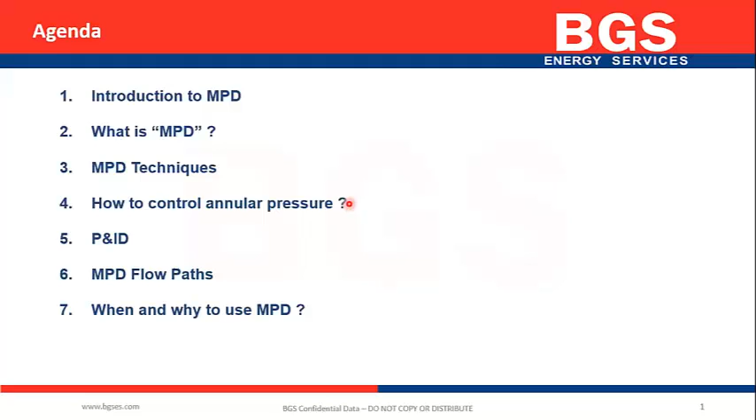So let's refresh our mind by speaking about conventional operations. During drilling, when the pumps are on, the bottom hole pressure is equal to the hydrostatic pressure plus the annular friction pressure. So we have the bottom hole pressure almost constant. But during connection, when the pumps are off, we lose the annular friction pressure because there's no circulation. So a drop in the bottom hole pressure happens, and if this drop is below the pore pressure, an influx may occur.

But in MPD operations, during drilling, yes, the bottom hole pressure equals the hydrostatic pressure plus the annular friction pressure, but we have an additional new term, which is the surface back pressure. So what happens when we turn off the pumps and go to do a connection? The equation becomes bottom hole pressure equals hydrostatic pressure plus surface back pressure. In that case, we increase the surface back pressure so that we can have an almost near-constant bottom hole pressure, the same during drilling and connection, or almost the same.

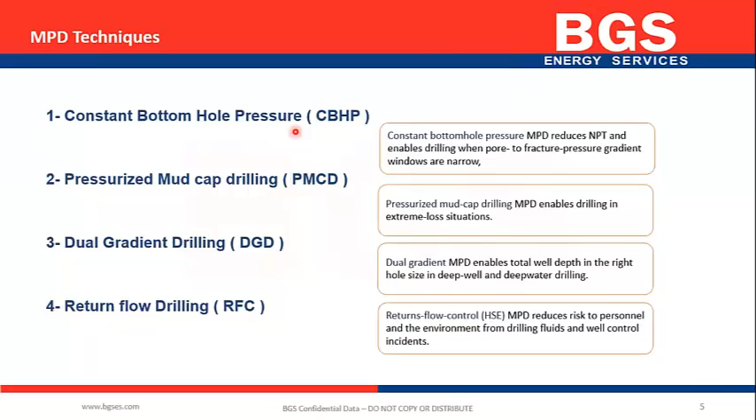So we said that the definition of MPD is to control the annular pressure. So how are we going to control the annular pressure? We need to use both engineering and equipment.

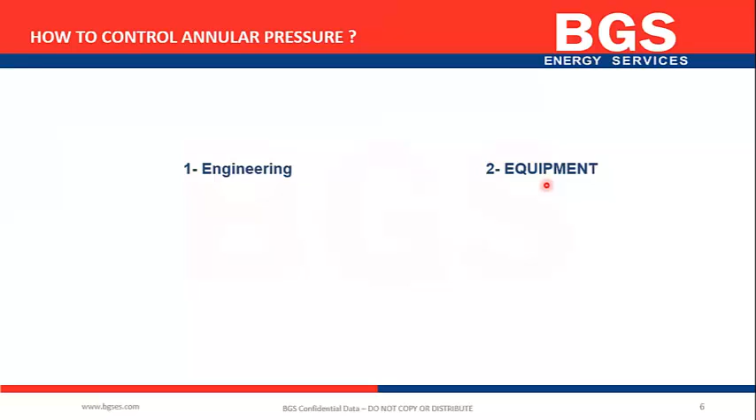So for the engineering, we should design our hydraulics. So what we need to know or to have: we need to calculate the MASP, which is the maximum allowable annular surface pressure. We need to know the annular friction pressure, and finally we need to calculate the bottom hole pressure.

So we have the pore pressure and the fracture gradient. We can use the fracture gradient to get the fracture pressure. The fracture pressure is equal to the hydrostatic pressure plus the MASP, which is the maximum allowable annular surface pressure that we shouldn't exceed, because if we exceed this value, we are going to frac the formation.

So we have the fracture gradient, we get the fracture pressure, we calculate the hydrostatic pressure, so the MASP will be the fracture pressure minus the hydrostatic pressure. So number one, we already know the MASP.

Second, we need to calculate the annular friction pressure. There's an equation we typically follow for calculating this pressure, which is equal to 1.4327 multiplied by 10 to the power negative 7. We multiply this by the mud weight in ppg and multiply by the true vertical depth in feet, then annular velocity divided by the hole diameter minus the drill pipe diameter.

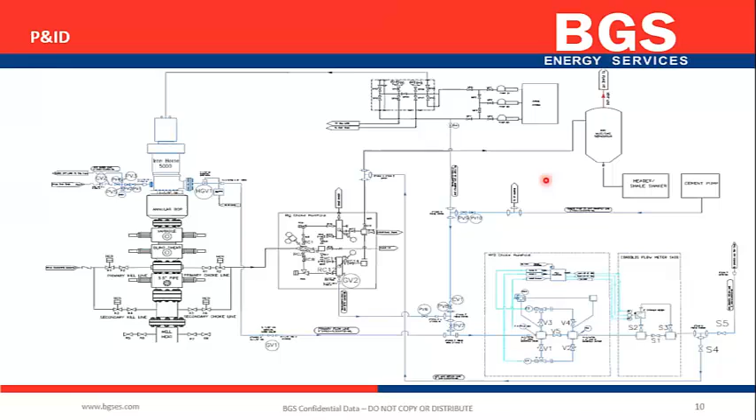Okay, we are going to speak about this point at the end of the presentation. There's a slide specifically about when and why to use the MPD. Okay, and another one wants you to repeat the circulation cycle again. Okay, on the P&ID, the one who asked about the circulation cycle, you need to know about the P&ID, right? I think that, yes. Okay, I will discuss it.

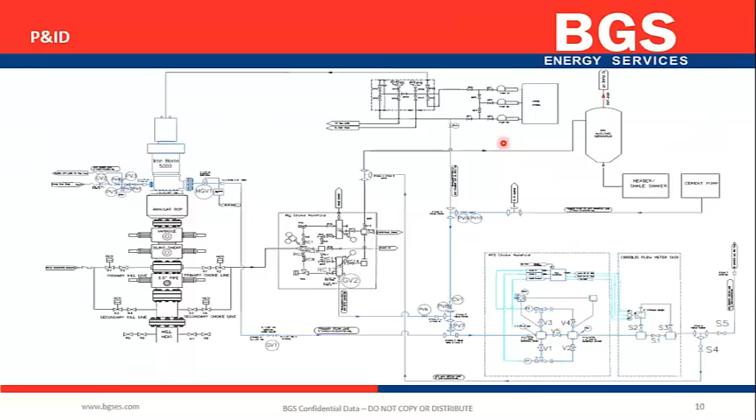Okay, so for those who were asking about the circulation, we will discuss now every condition we have: the drilling condition, during connection, how the flow path works if we are going to circulate an influx, and also during conventional drilling.

First, let's speak about the drilling flow path using managed pressure drilling. Usually we have the rig pumps which start circulating, it goes out from the standpipe, it goes down. This is normal, but the return we take from the RCD, and instead of sending it to the rig choke like in conventional operation, we send it following the arrow.

We move directly to the MPD choke manifold. If it's okay, nothing happened, we continue to the Coriolis flow meter. We measure the flow, and if it's okay, we send it to the shale shaker if there's no gas, and directly to the shale shaker and the MGS if we need, completing the circulation process. This is during using the MPD, which means the flow passes through the MPD choke manifold.

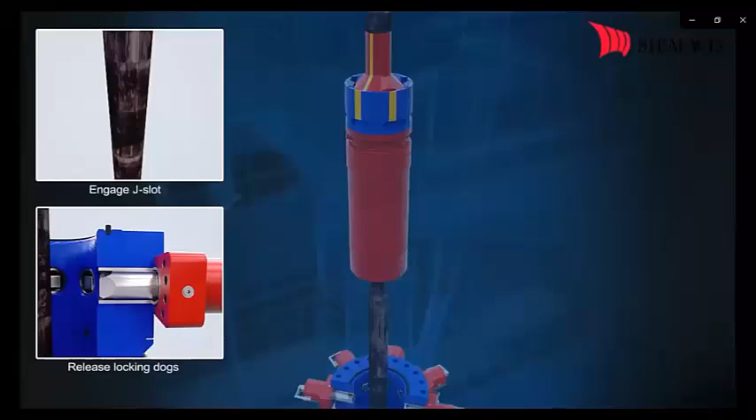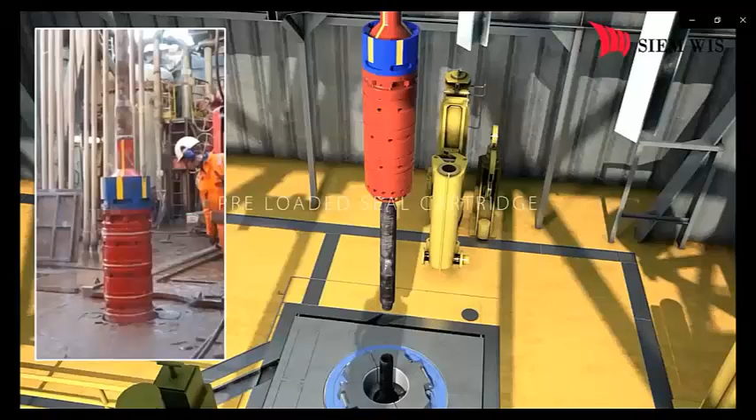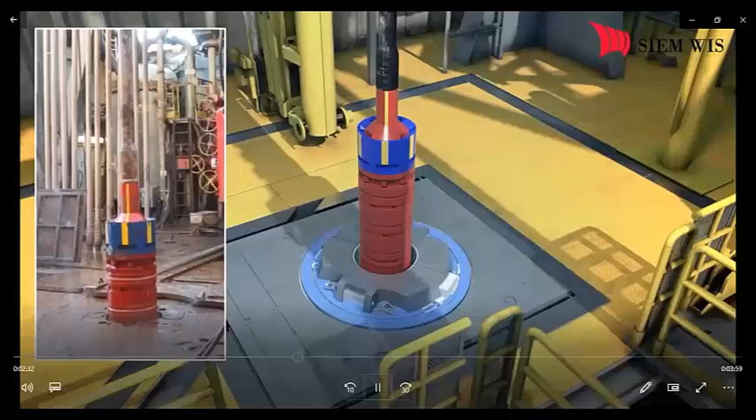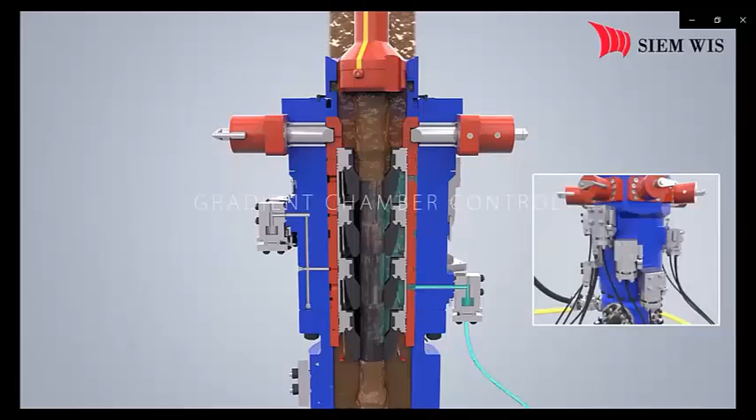The preloaded seal cartridge is retrieved from the deck, made up, and run in hole using the speed-fixed J-slot running tool. The locking dogs lock the seal cartridge in place when the seal cartridge is landed. Fluids for gradient chamber control and seal lubrication are injected into the seal cartridge, and the packing system integrity is checked and controlled on the control system display.

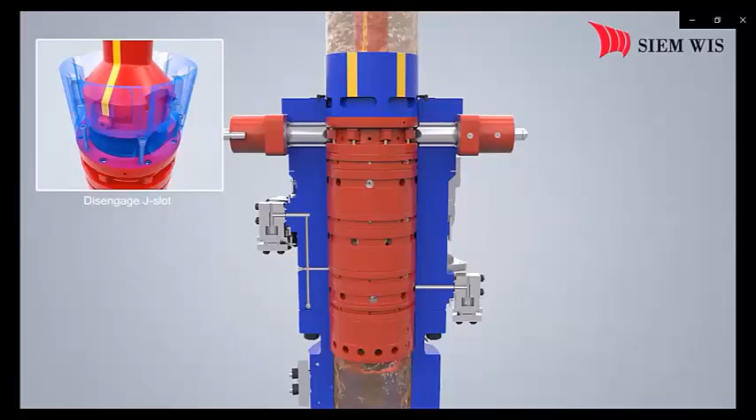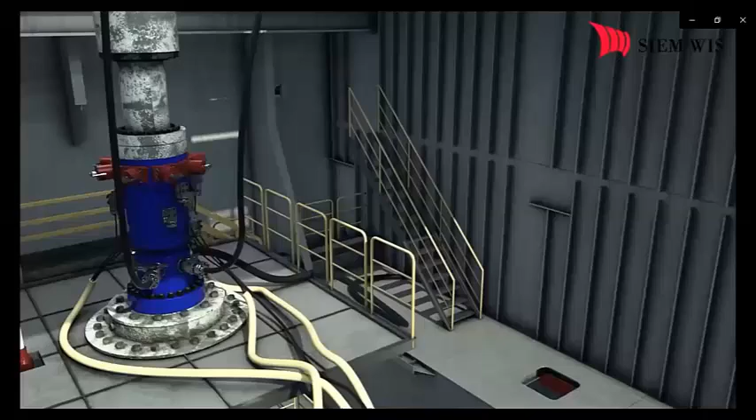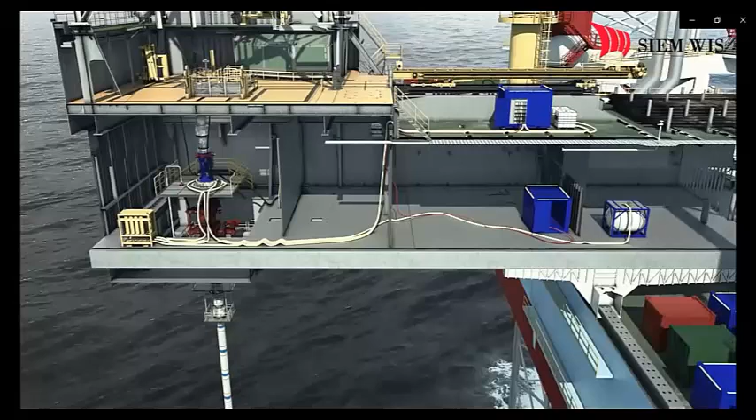The Siem WIS PCD pressure control device system consists of the pressure control device with seal cartridge and bore protector, a pressure distribution skid, a control container, lubrication tanks, a visual display, and drain tanks.

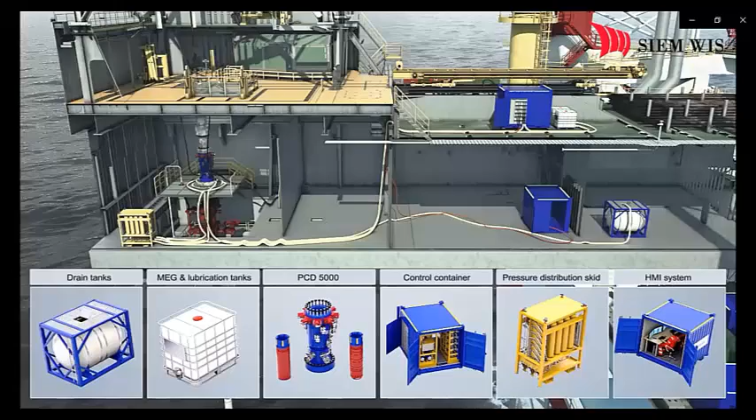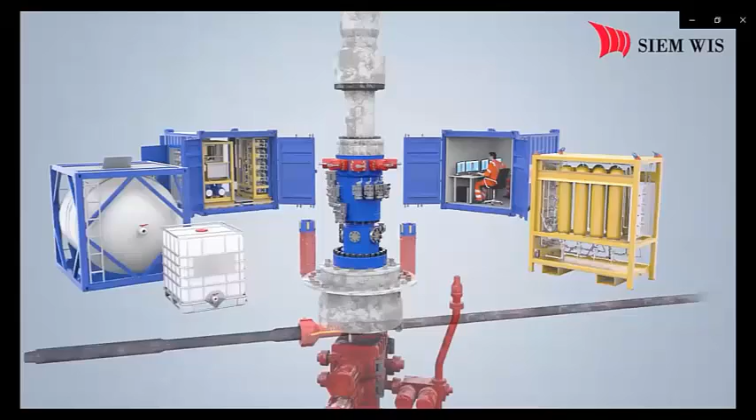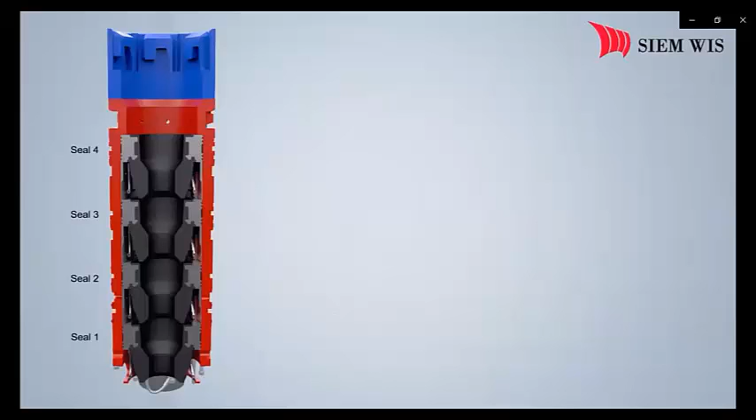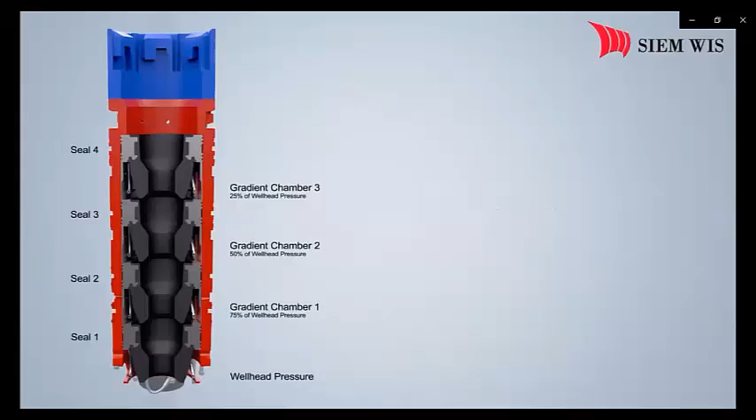The patented sealing solution represents a new and reliable technology for the MPD industry. Instead of one or two rotating elements, as in most RCDs, the Siem WIS system uses four non-rotating seals, stacked in a seal cartridge. The well pressure is evenly distributed over the seals by means of gradient chambers. There are pressure sensors below each seal for control and monitoring purposes.

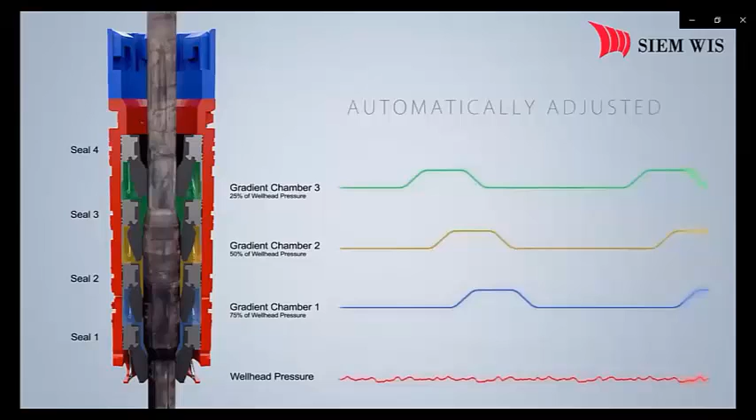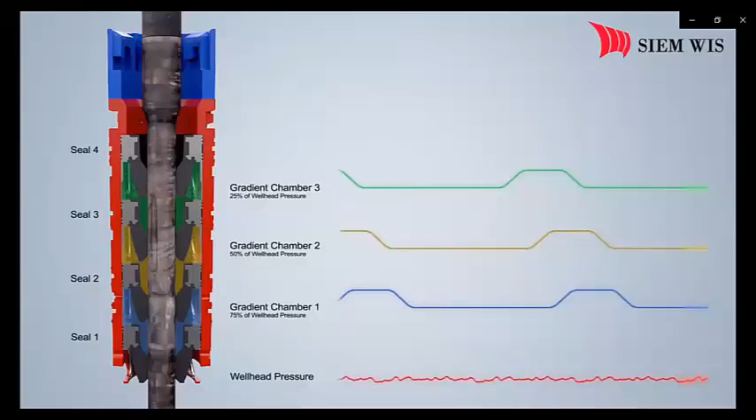The condition of each seal is continuously monitored and logged. The gradient chamber pressures are displayed on the control system and automatically adjusted depending on well pressure. During drilling, the operator monitors real-time seal status, allowing immediate seal leakage detection. The operator will continuously monitor leakage on the HMI system and can plan for seal cartridge replacement when convenient. Due to the multi-seal configuration, drilling can continue even in the event of a seal failure.

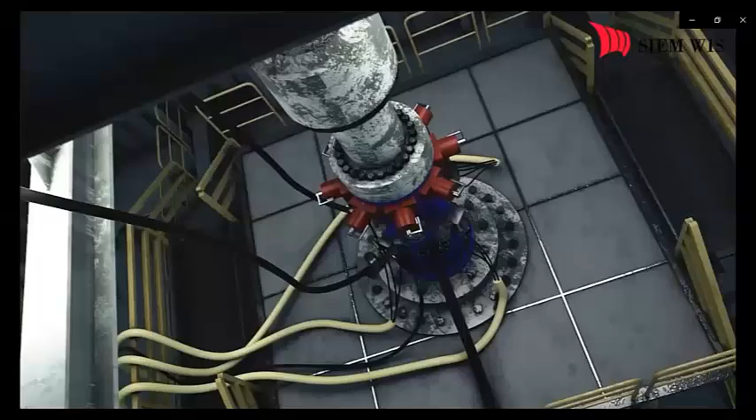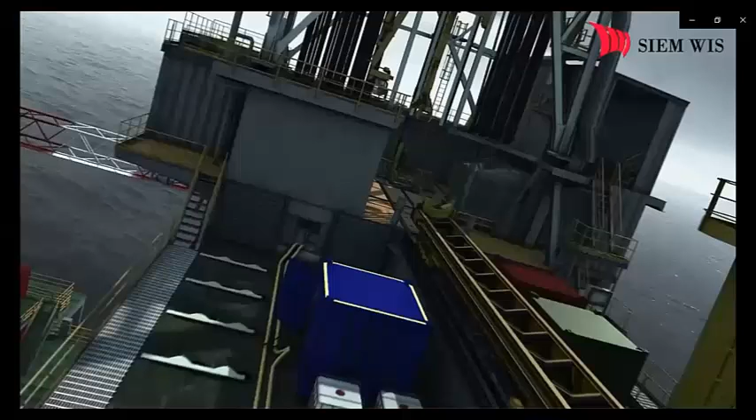This excellent redundancy in the PCD provides valuable and secure predictable information. The Siem WIS PCD system represents a game-changing technology for the managed pressure drilling industry, providing predictability through real-time condition monitoring of the seal status, early wear detection, and redundancy through the multiple seal barrier. In addition, running the seal cartridge is fast, safe, and efficient. Welcome to the future of pressure control heads.

So, gents, before we go on, I need to know if anyone has any question on this video.

Okay, I can repeat it again because this video is important so that it can make the definition of the RCD clear.

Engineer Ahmed, I think the problem was the sound of the video. The sound of the video wasn't good. Can you share a link for the video? Okay, but let me try to play it again. Okay, and if this time it works, okay, if not, I'm going to send it to you. Okay, Engineer Ahmed.

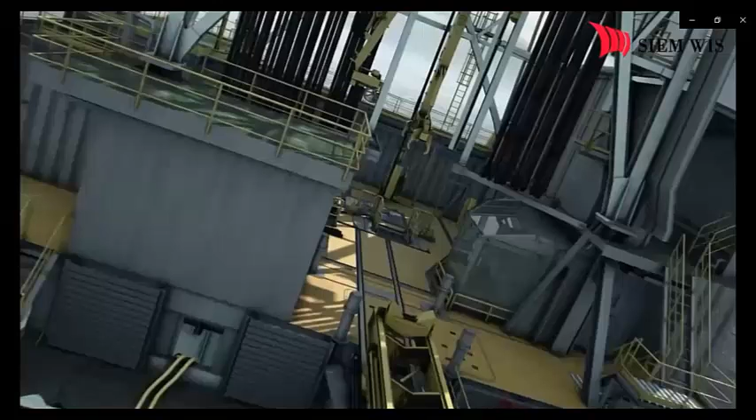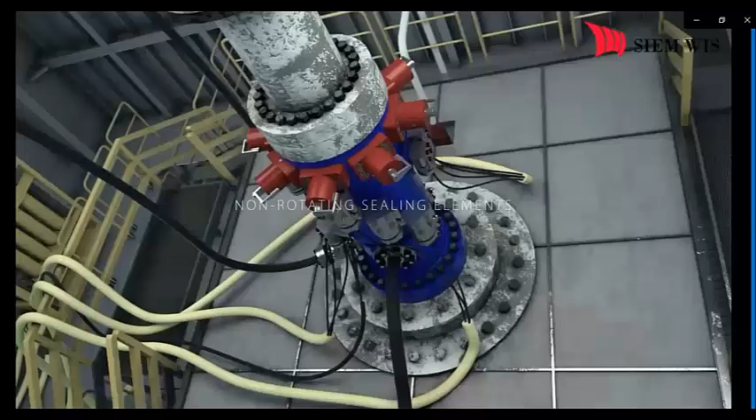The Siem WIS pressure control device, the PCD 5000, is a device that caps and seals return mud flow in managed pressure and underbalanced drilling operations for fixed installations. The control device uses Siem WIS's unique and patented sealing solution, which provides a safe, predictable, and efficient sealing technology using non-rotating sealing elements. The PCD is a multi-seal barrier with seal status monitoring in managed pressure drilling operations.

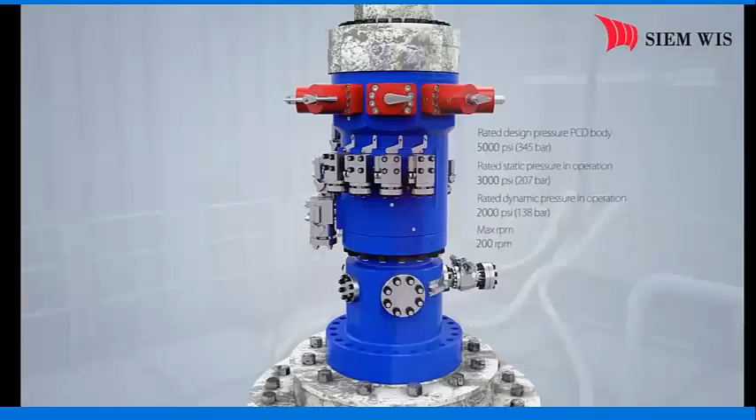A bore protector is installed when seals are not required. The protector has a through bore of 13 5/8 inch.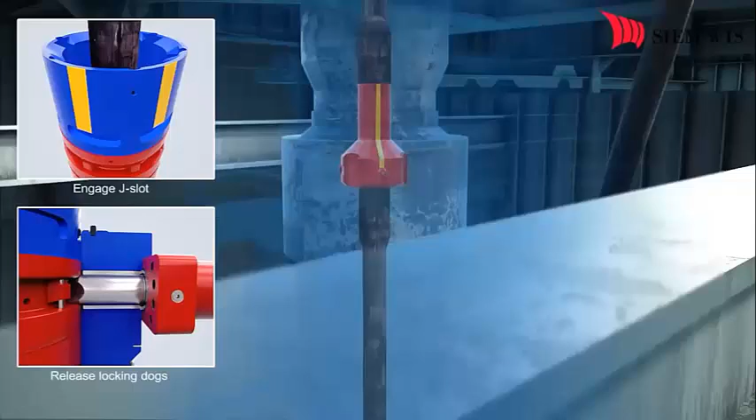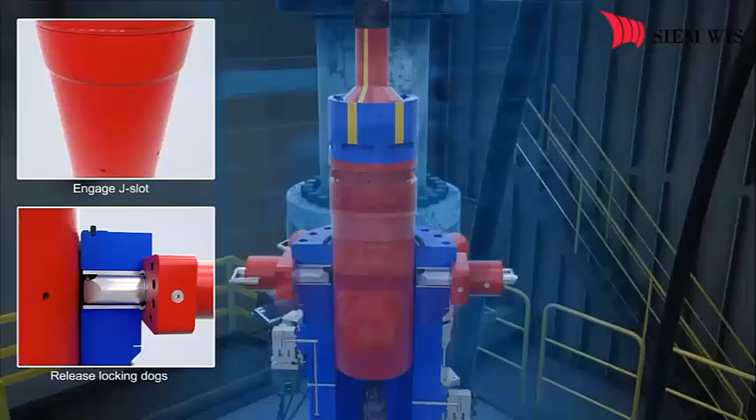The bore protector is run and retrieved with a fixed J-slot running tool installed in the drill pipe. When the running tool has engaged the J-slot, the locking dogs are released and the bore protector can be retrieved. The bore protector is retrieved and can be racked back in the derrick.

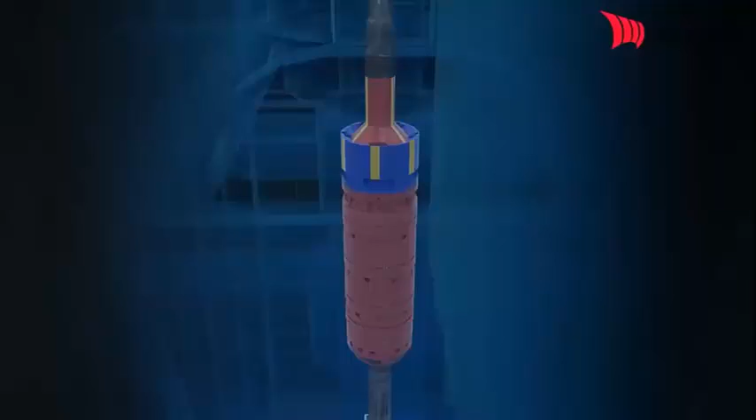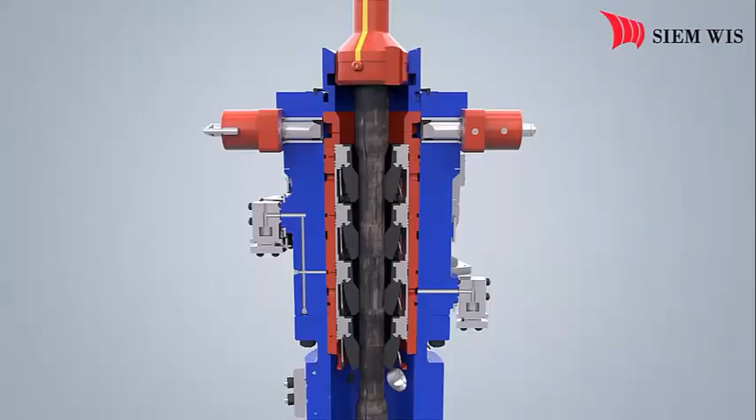The preloaded seal cartridge is retrieved from the derrick, made up and run in hole using the same fixed J-slot running tool. The locking dogs lock the seal cartridge in place when the seal cartridge has landed. Fluids for gradient chamber control and seal lubrication are injected into the seal cartridge, and the PCD system integrity is checked and controlled on the control system display.

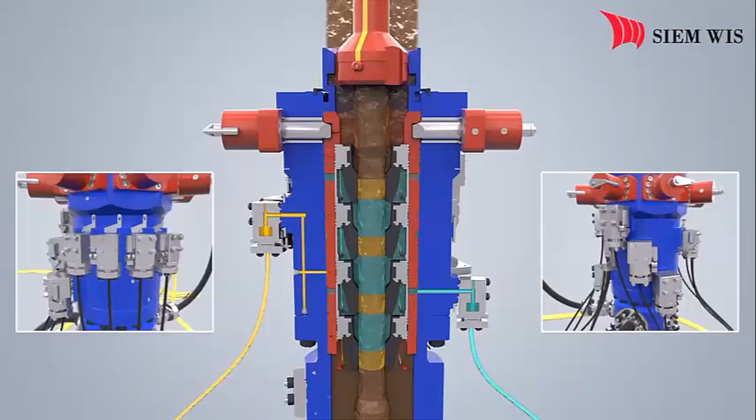The pressure below the PCD is equalized prior to opening the annular. The running tool and drill collars can now be racked back in the derrick.

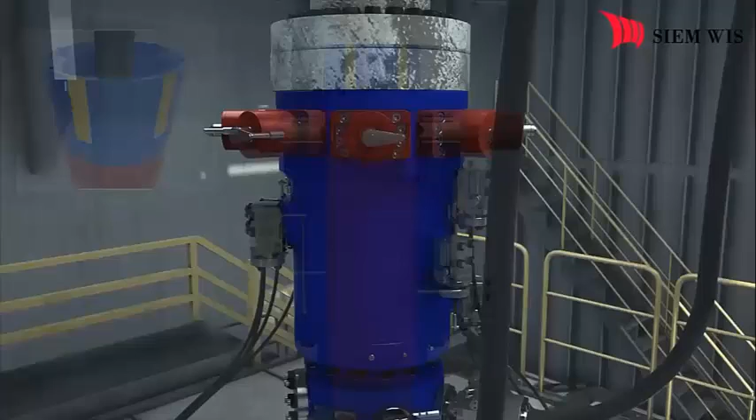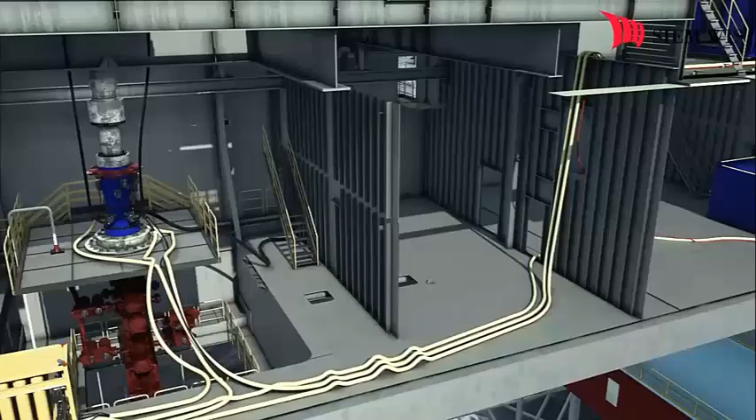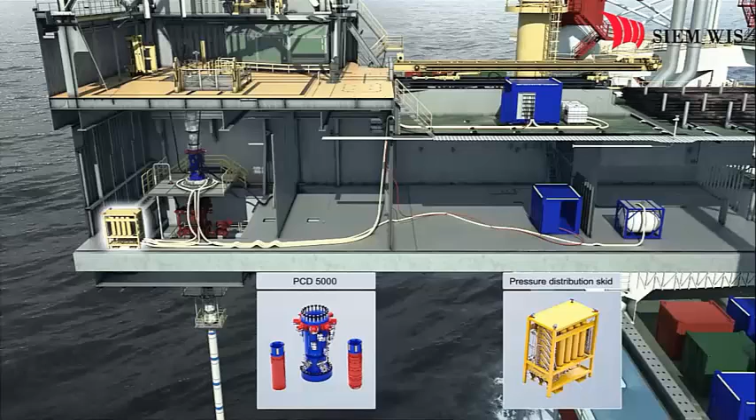The Siem WIS pressure control device system consists of the pressure control device with seal cartridge and bore protector, a pressure distribution skid, a control container, lubrication tanks, a control system display, and drain tanks.

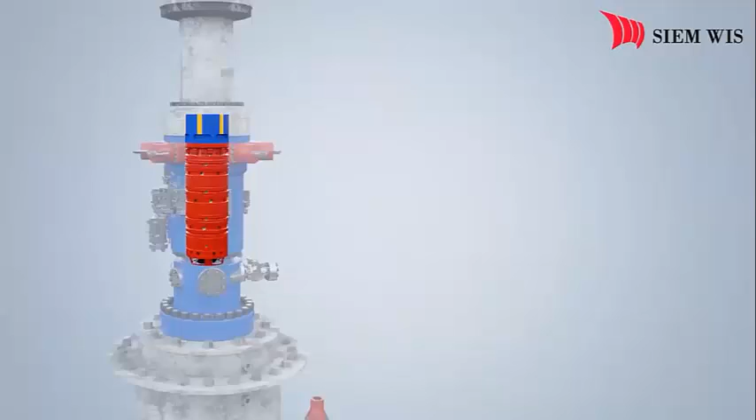The patented sealing solutions represent a new and reliable technology for the MPD industry. Instead of one or two rotating elements, as in most RCDs, the Siem WIS system uses 4 non-rotating seals, stacked in a seal cartridge. The well pressure is evenly distributed over the seals by means of gradient chambers. There are pressure sensors below each seal for control and monitoring purposes.

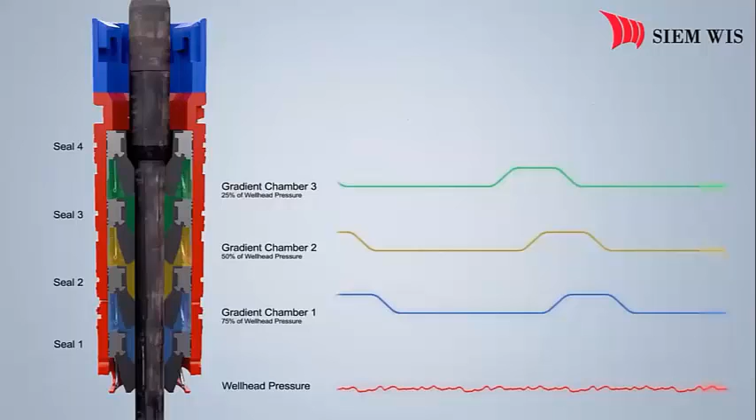The condition of each seal is continuously monitored and logged. The gradient chamber pressures are displayed on the control system and automatically adjusted depending on well pressure.

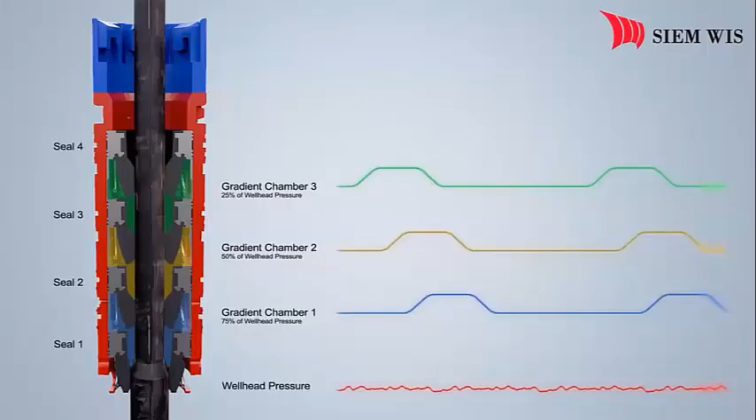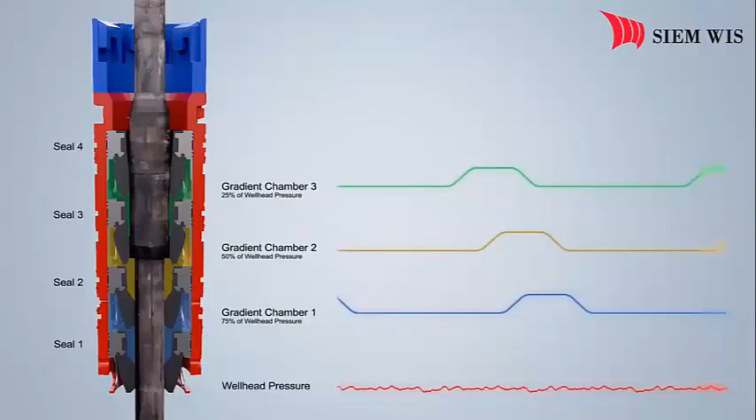During drilling, the operator monitors real-time seal status, allowing immediate seal leakage and wear detection. The operator will identify any sign of wear and leakage on the HMI system and can plan for seal cartridge replacement when convenient. Due to the multi-seal configuration, drilling can continue even in the event of seal failure. This excellent redundancy of the PCD provides valuable and secure predictability for the operation.

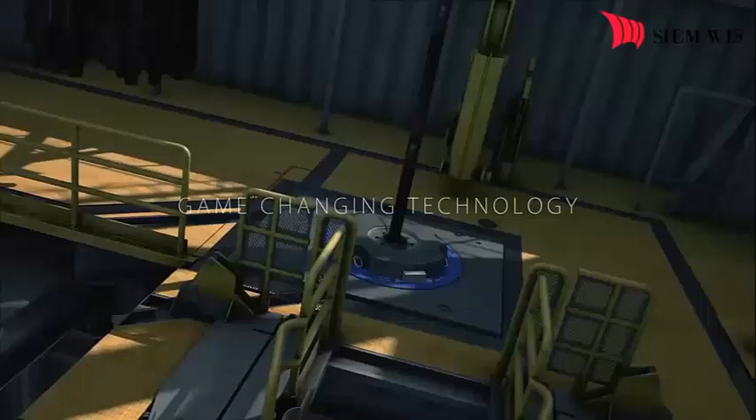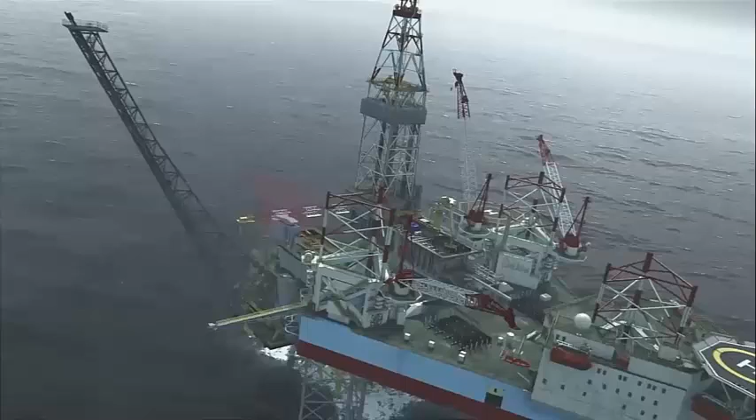The Siem WIS PCD system represents a game-changing technology for the managed pressure drilling industry, providing predictability through real-time condition monitoring of the seal status, early wear detection, and redundancy through the multiple seal barrier. In addition, the running of the seal element cartridge is fast, safe, and efficient. Welcome to the future of pressure control heads.

Hey gents, please let me know if the video was good and you hear it well, or you need me to explain it. Or if you have any questions, please go ahead and ask.

I think there are no questions for the video, but you can explain the main parts of it. Okay, does someone need me to explain it? Just let me know which part you need me to explain. I think explain the main part of the video, the main objective of the video. Okay.

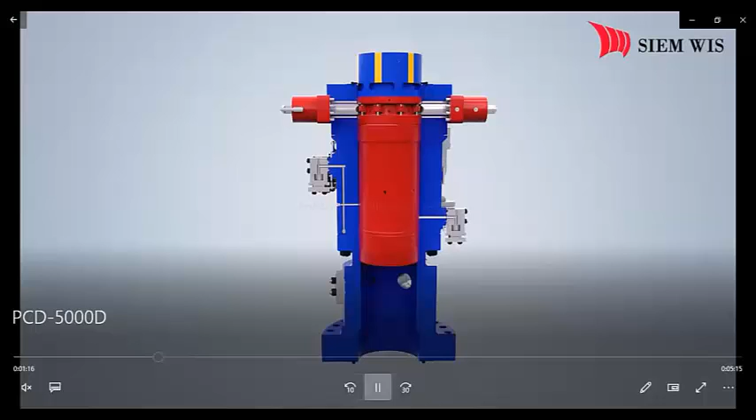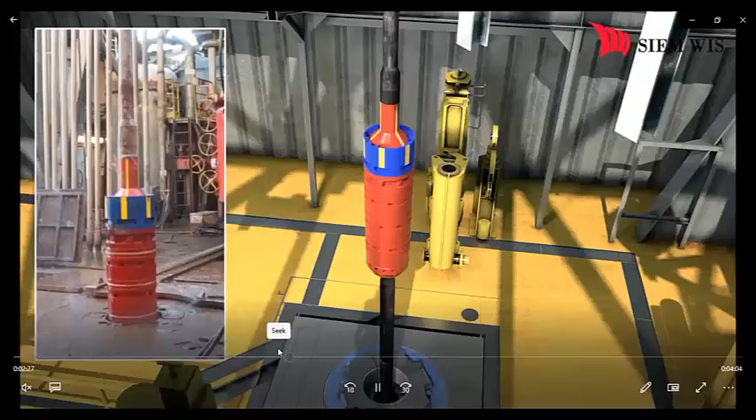Okay, first, for the one who asked about the G slot tool, it's used to remove the packer or rubber from the PCD. First, the PCD is like the RCD, the rotating control device. It has a sealing cartridge, or rubbers. Here it is: 1, 2, 3, 4. These rubbers are used to isolate the wellbore, and the function is that it can rotate, it allows the drill pipe to rotate inside.

So if something happens and there's a failure with the rubber, we need to replace this cartridge. So how do we replace it? First, we open these remote dogs, and then we insert the G slot tool, and we use it to pick up or retrieve the packer from the RCD, as you can see now.

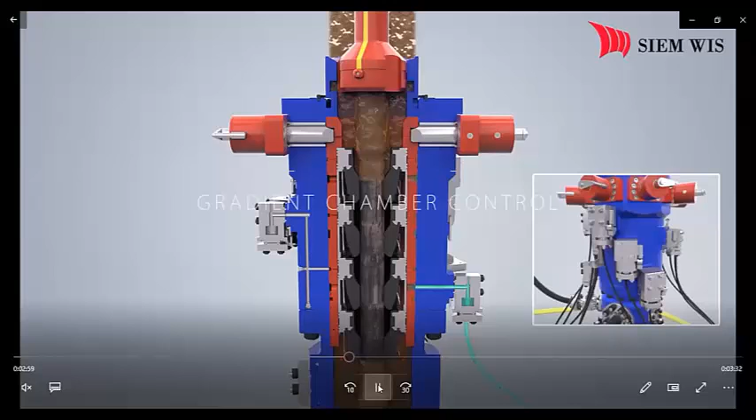The gradient chamber: this chamber is like a lubricant for the rubber, and it has two functions. First of all, it's a lubricant to lubricate between the pipe and the rubber, and second, to apply pressure to the rubber so it keeps it tight.

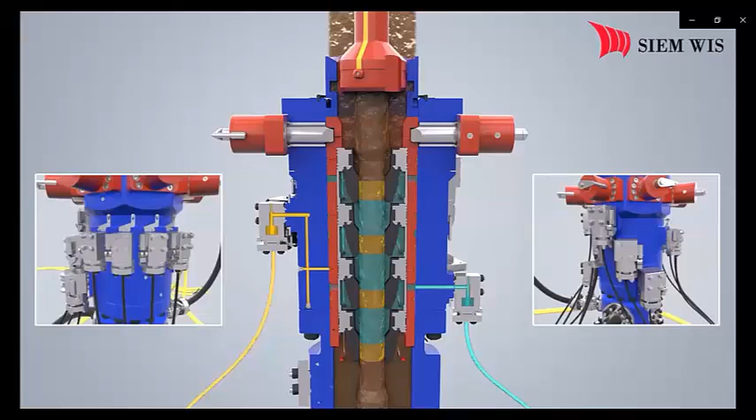Okay, this is the G slot tool. If we need to replace it, it goes down, and then we open the dogs and we retrieve the packers up.

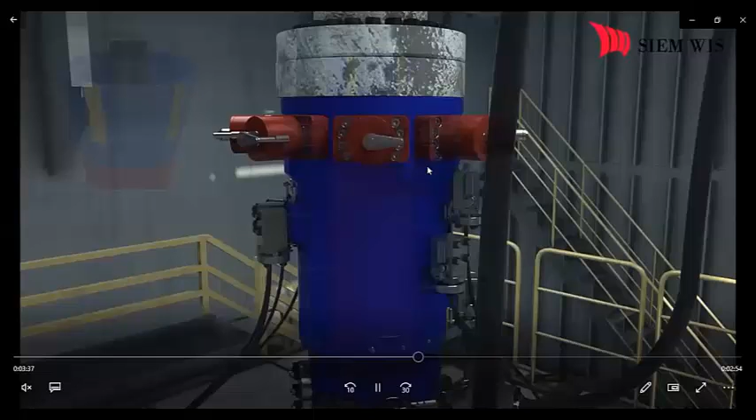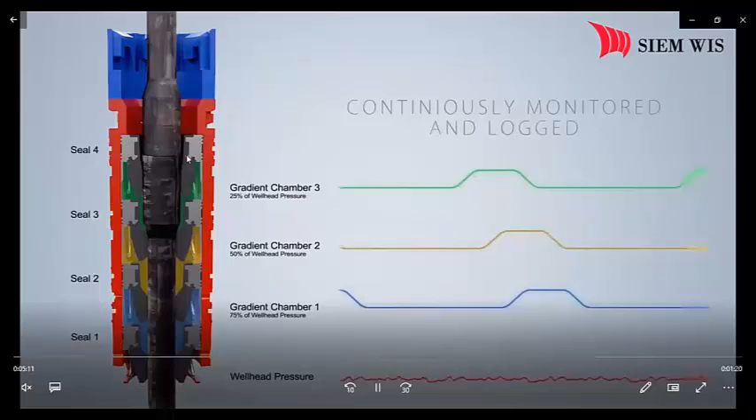Also for the one who asked about the gradient chamber, I will explain this part. The gradient chamber helps us distribute the pressure on the rubbers. We use fluid, and we can apply 75% of the wellhead pressure to this rubber, decreasing it as we go up. It also helps us monitor the rubber state, because if a leak or failure happens to the rubber, you will find the pressure dropping on the screen, because it lost pressure on the rubber.

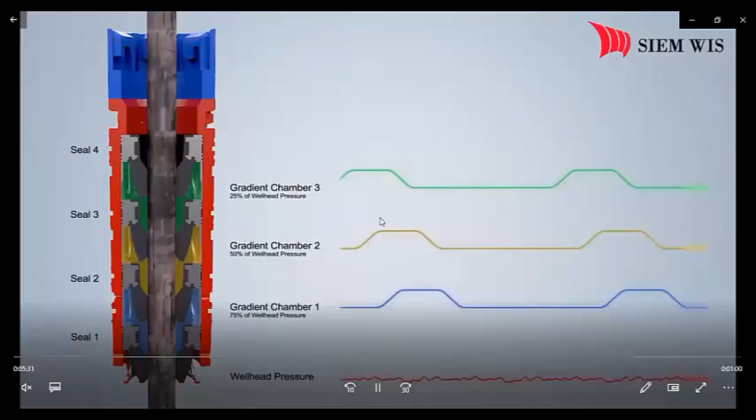If you see when the tool joint comes through, apply more back pressure so the pressure goes up, until we finish.

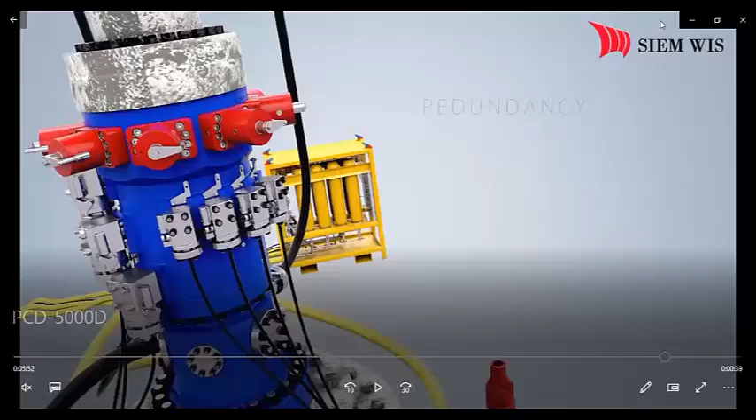I hope this covers your questions. Okay, before we keep going, I need to reply to a question. I was waiting until I show you the video, I guess.

Amr was asking that we can compensate for losing friction pressure by trapping more PSI, but what about other parameters such as surge and swab? And he also asked about the thermal effect.

Okay Amr, the swab effect happens from moving the pipe too quickly when you are pulling out of the hole, moving it up, and the swab effect may induce a gain or influx. The surge is the opposite, if we are going down too quickly. Usually there's an MPD operator on the rig floor 24/7, seated with the driller, making sure he's moving the pipe as slow as possible so that we avoid the swab and the surge.

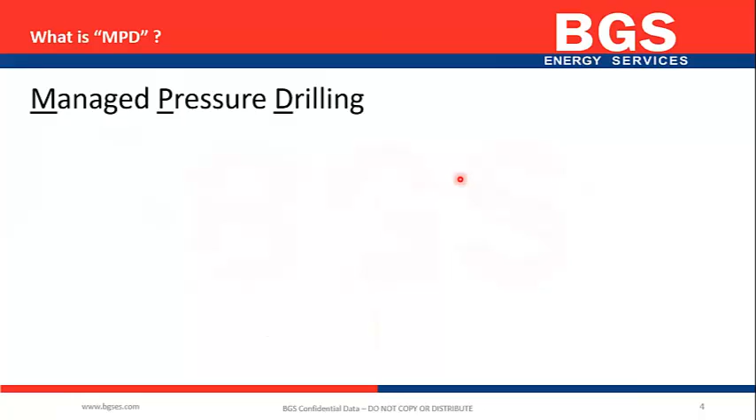Another question. Another question was how does managed pressure drilling optimize the number of casing strings? Yeah, we just answered this.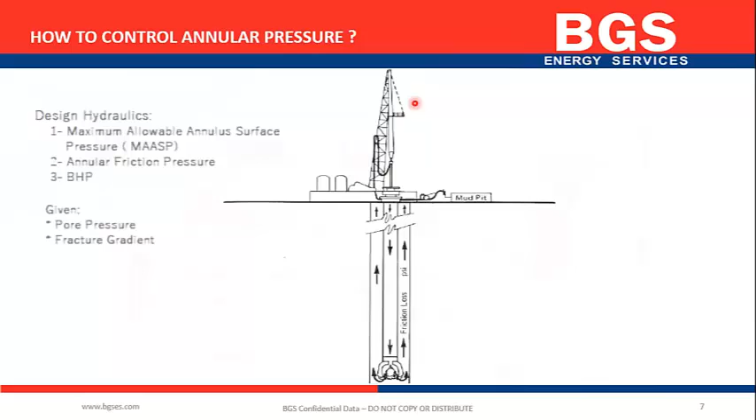Okay, so during connection, we circulate through the RCD, have the return goes to the MPD manifold, but we have our back pressure pump that applies pressure at this point. So it has a back pressure on the return flow. At the same time, we are circulating from the back pressure pump through the MPD manifold. So we do like a closed loop here that applies back pressure on this side, which by the way keeps the pressure at the bottom hole while connection.

So it's just an equalization? Yes, applying back pressure by closed loop. Okay.

The next question: can you please explain the main steps of planning and designing of an MPD project? Yes, we can, but I can send it to you with the reference. First you review the data, you check what is the problem we have, you select the mud we are going to use, then you start the hydraulic simulation and start selecting the equipment, and then do the risk assessment, the HAZOP process, and so on. So I can send you with the reference all the steps.

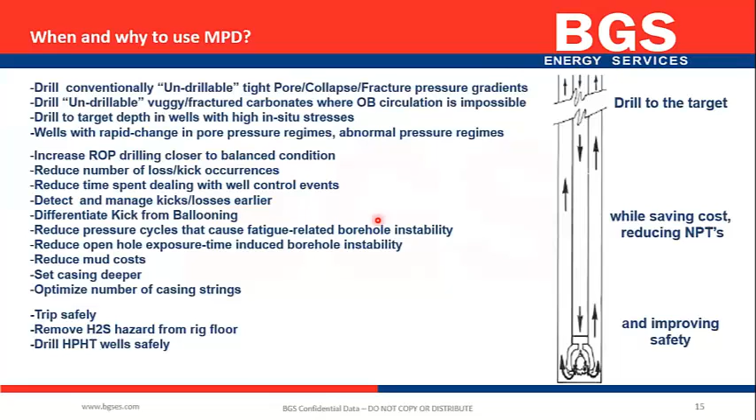Can you change the rubber under pressure? Yes, we can change the rubber under pressure, but in that case we divert the flow through the rig choke and we have to close the BOP.

Okay, so any other questions?

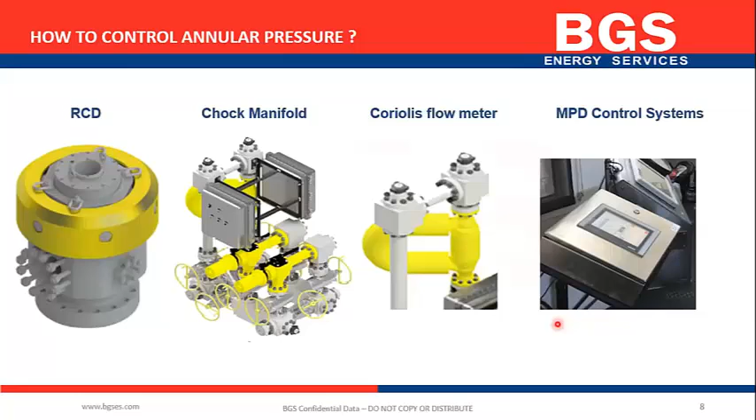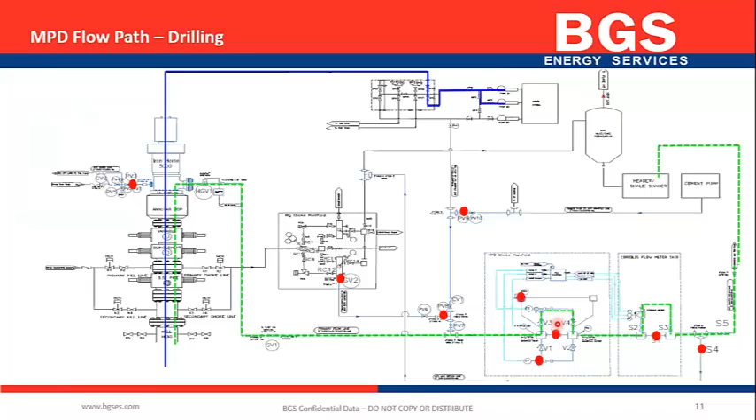So what are the challenges you have while switching from rig pumps to cement pump during connection? Let's go back, I will show you. During connection, we have no challenges. It's just cooperation with the driller - we start the back pressure pump, turn off the valves to avoid any return to the rig choke, and divert the flow to the choke manifold, circulating to make a closed loop again. Then the back pressure pump creates back pressure to the flow. So definitely no challenges, just the driller's cooperation.

So any other questions? Please don't hesitate to ask.

So Engineer Ahmed, it seems that there are no other questions. So for you, if you would like to say something before ending.